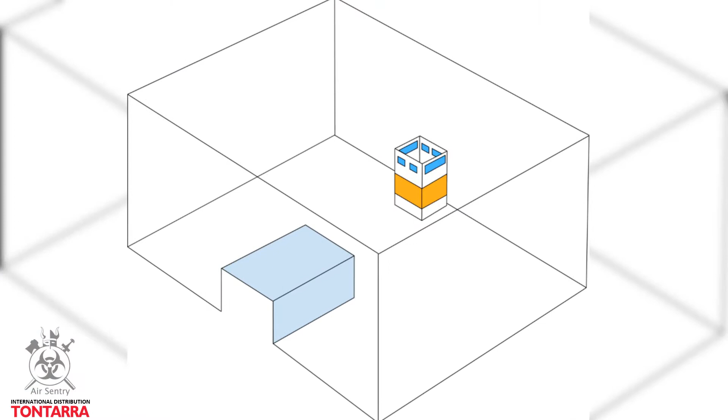So how does it work? What you see in front of you is a computer mock-up of a room, in this case an intensive care room, but it can be an operating theatre, outpatients, oncology, etc.

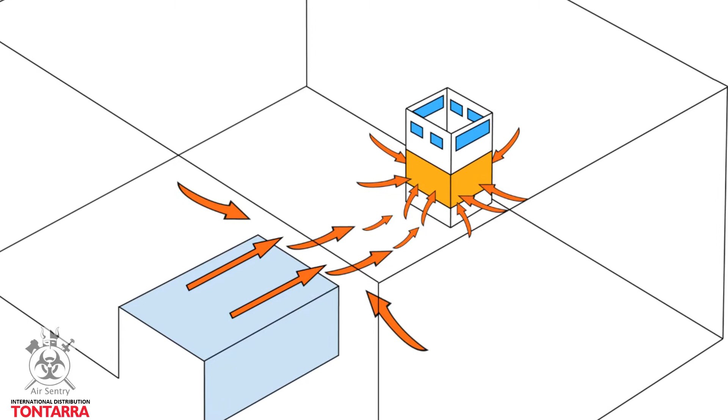The system is placed away from the work area, which is counterintuitive, but it starts to pull dirty air down towards the floor and into the unit. This pulling of the air gets across all the work surfaces, but most importantly, it gets into the corners of the rooms, the areas that tend to stagnate with conventional airflow systems.

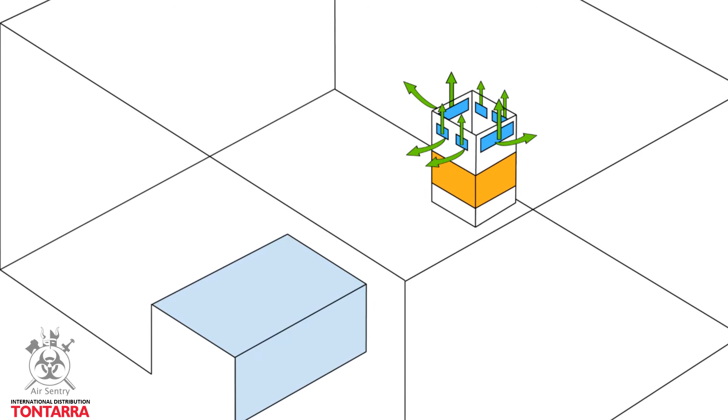And it produces a rotational airflow that gets from the ceiling around the entire room back towards the filter. This air is pushed up towards the ceiling and over the area of interest, over the patient, over the work area. However, this airflow is not just circular, getting into the entire room, it's also cyclonic, rotational. So it's cleaning and diffusing the entire room air with every single filter pass.

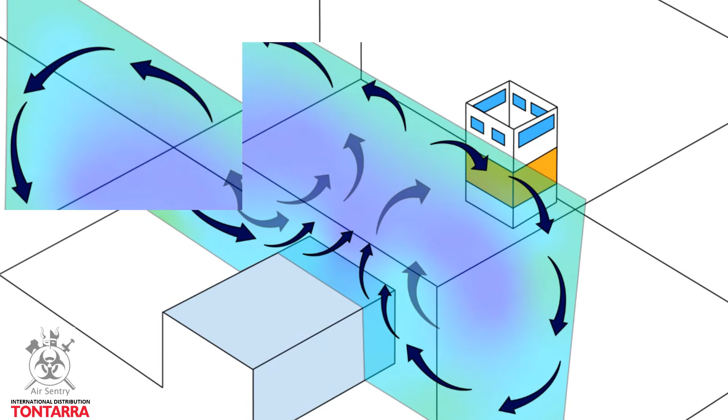It takes about 10 minutes of operation for Air Sentry to reach a point of ultra cleanliness in room air, in an intensive care room as an example, or around a nurse station. It then takes a further 20 minutes for it to maintain that, but the system is designed to run 24/7 and it has a mean time to failure rate, as long as it's serviced, of 10 years.